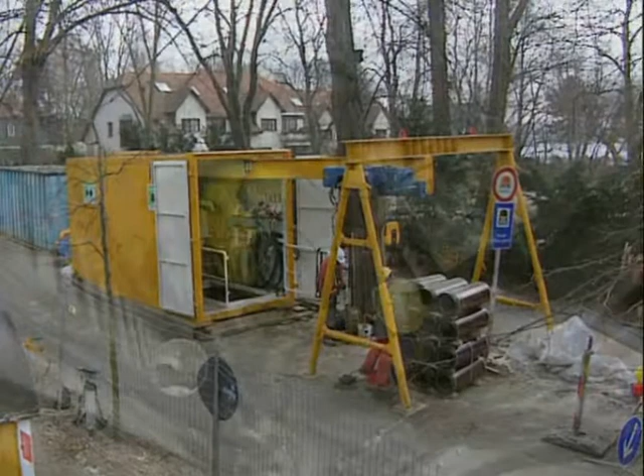Throughout the world, pipe jacking and microtunneling are becoming increasingly important for the installation of new service pipes and sewer pipes. The Herrenknecht AVN series introduced in this film has been deployed successfully on every continent.

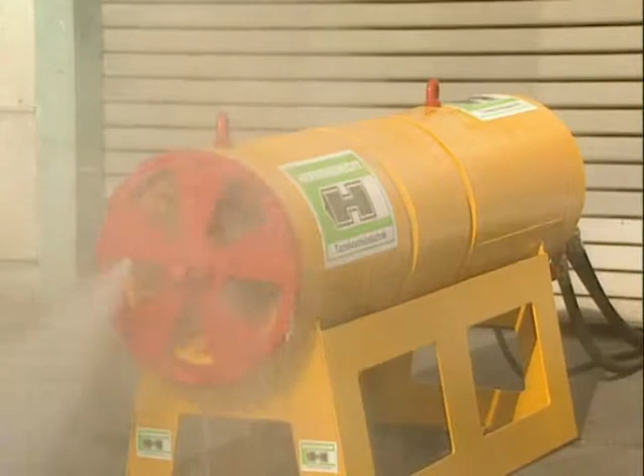The advantages of the pipe jacking and microtunneling process are evident, especially in urban city areas. Pipe jacking causes minimum disturbance along the construction route, so there's virtually no disruption to the flow of traffic or any impact to the local economy. In contrast to conventional methods in such construction projects, pipe jacking and microtunneling is an environmentally friendly method and helps

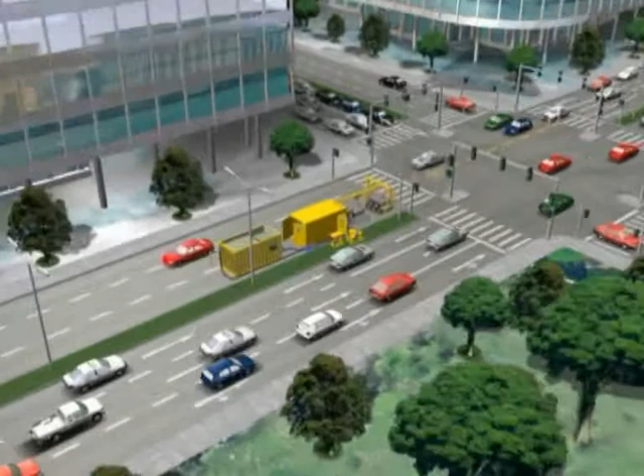The following animation shows the installation of new sewer pipes DN600 in an urban crossroad with dense traffic. The whole construction site can be located in a way that only one lane is blocked.

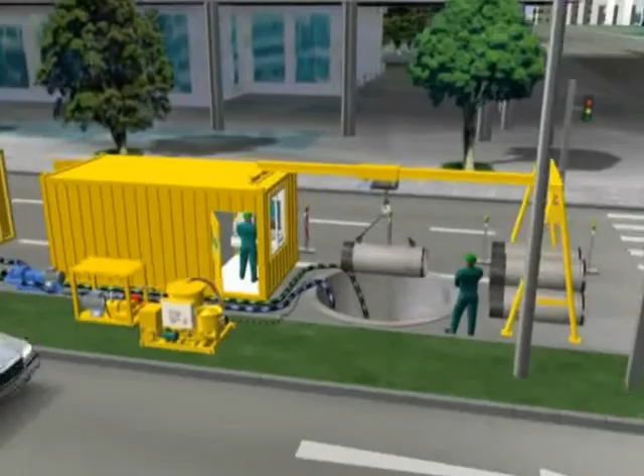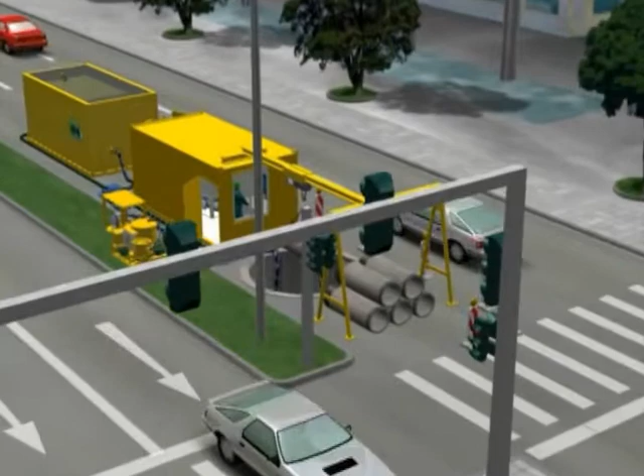In our example, 150 meters of sewer pipe are to be jacked from the launch shaft to the reception shaft. At the first stage, the area around the starting shaft is cordoned off to divert the traffic. Due to the compact design of the machine and the small diameter of the starting shaft, there will only be minor disruption to the traffic flow.

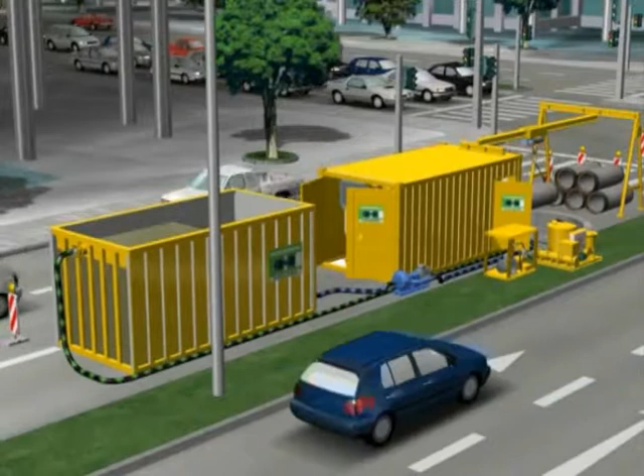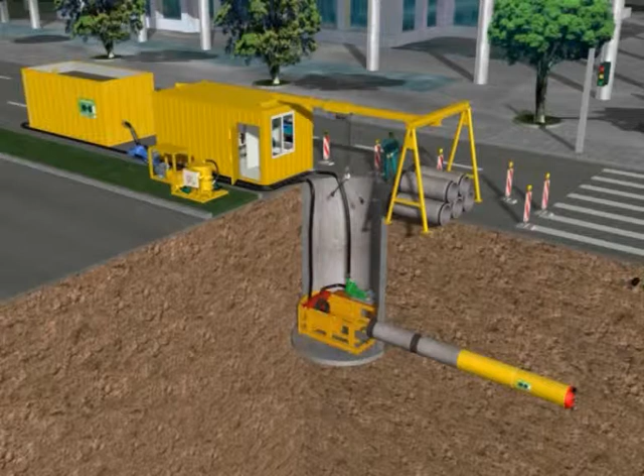In this case, the starting shaft consists of a round shaft of reinforced concrete with an inner diameter of 3.2 meters. The compact jacking frame is then placed into the starting shaft, and the slurry discharge pump is mounted on a platform adjacent to the jacking frame. The operating container with the control panel and the hydraulic power pack is located on the top rear side of the shaft. A pipe stock is then established and maintained in front of the shaft to feed the shaft crane.

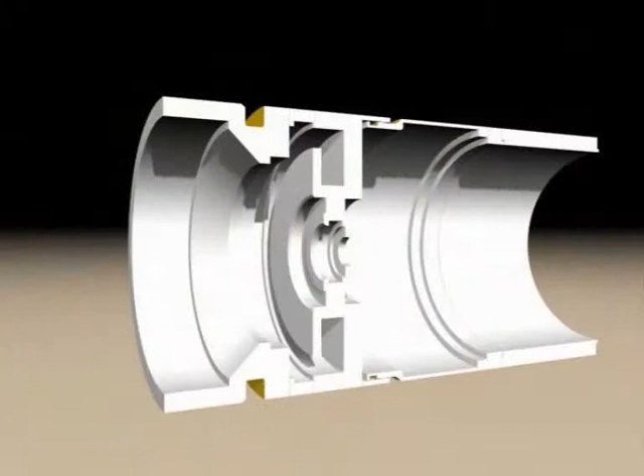The slurry feed pump and the slurry discharge pump are connected between the shaft and the control container, and then connected through the separation plant to form a closed slurry circuit. The AVN 600 machine consists of several segments.

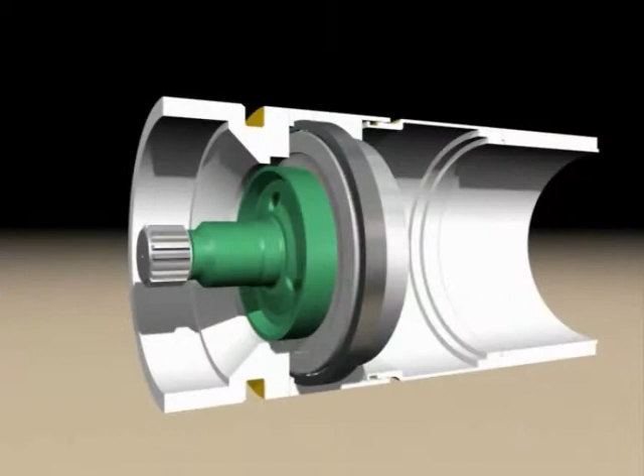A sleeve shaft with 3 bolt holes connects the cutting wheel with the drive unit. Fresh water is then pumped from the slurry tank and centrally pushed through the machine to pick up the excavated material. The mixed slurry is then picked up by the discharge pump and transported to the separation plant on the surface.

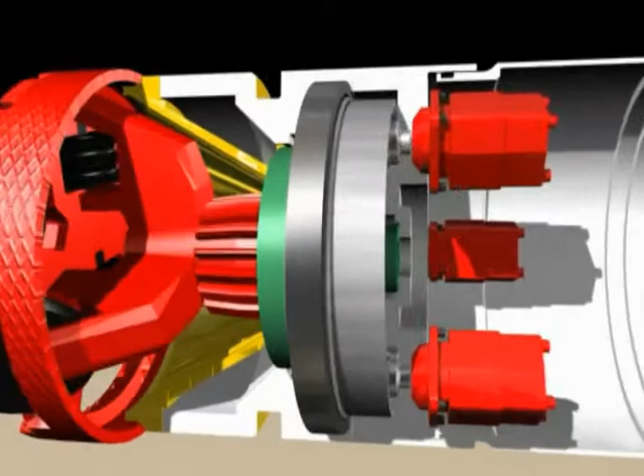The conical crusher situated in front has reinforced cutting bars and is provided with nozzles to inject the fresh water. The drive shaft, which is connected to the cutting wheel, is driven by hydraulic motors. The sleeve shaft lies in a tapered roller bearing. 3 hydraulic motors transmit the rotation via the gear rim to the sleeve shaft and the cutting wheel.

The 3 steering cylinders enable the operator to correct the direction of the tunnel boring machine, as well as control the alignment of the machine in curved drives. Therefore, the position of the cutter head is continuously updated with the help of the laser guidance system.

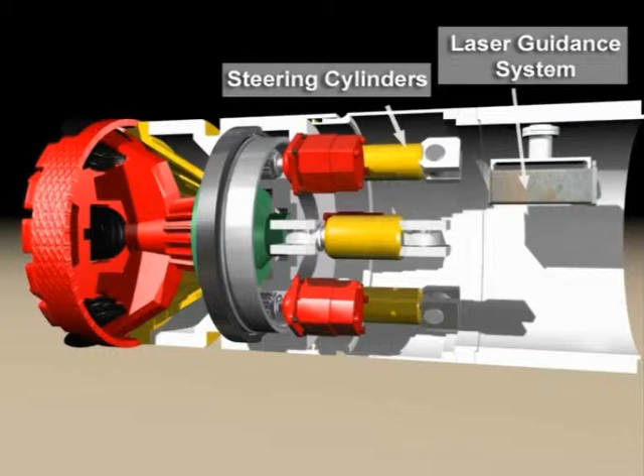To ensure AVN 600 has a smooth method of excavation, the machine has 2 integrated water circuits. The standard water circuit supplies fresh water to the annulus via 5 hoses fixed to the inner side of the bulkhead.

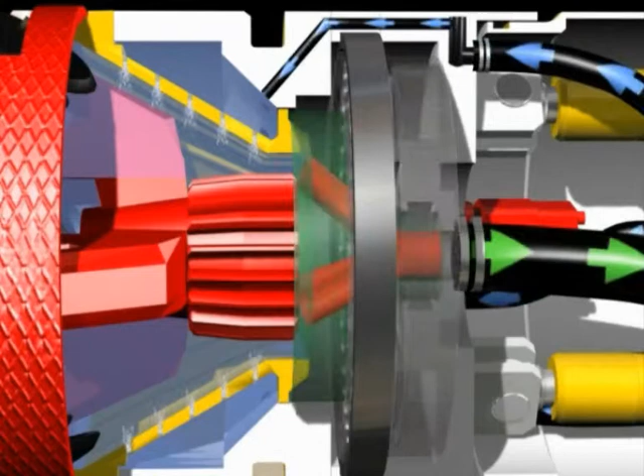Several boreholes branch off from the annulus, which supply the chamber situated behind the conical crusher. The fresh water is continuously pumped through the conical crusher chamber and sucked off through the boreholes of the sleeve shaft and transported back to the surface with the shaft slurry pump up to the separation plant.

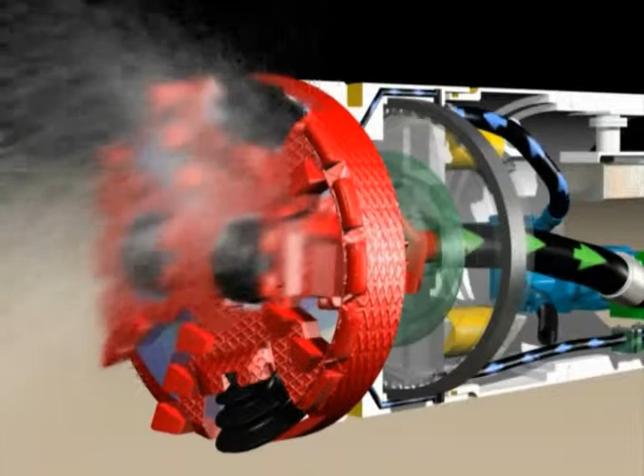A second hose supplies the high-pressure nozzles used in the conical crusher. These nozzles avoid clogging and agglutination of the crusher chamber in case of cohesive soils. They cut the clay in the crusher chamber with 250 bar water pressure and break up the material. There are also 2 nozzles that are directed to the front part of the cutting wheel.

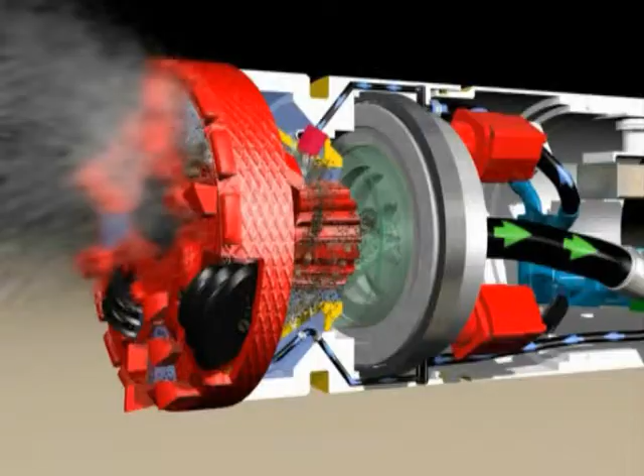This totally depends on the geological situation, as the number of nozzles can be increased. The water coming from the nozzles is mixed with the water of the slurry circuit, and the excavated material is transported to the surface.

The cutting wheel excavates the material at the tunnel face, which is pressed into the crusher chamber and is ground into the appropriate grain size by the spokes of the cutting wheel, which operates on the same principle as a coffee grinder.

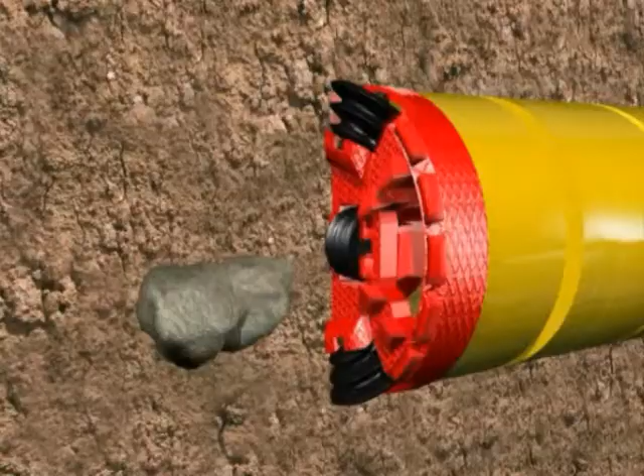Large stones are crushed by the discs of the cutting wheel. Sometimes fragments are driven out into the surrounding soil.

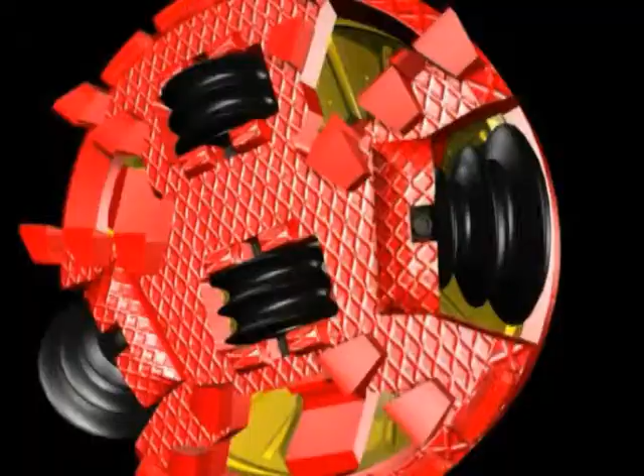Stones falling through the openings of the cutting wheel into the crusher chamber are crushed by the reinforced conical crusher and the spokes of the cutting wheel, and afterwards transported together with the slurry water to the surface.

The material is picked up in the slurry circuit and transported to the separation plant through the central slurry discharge hose.

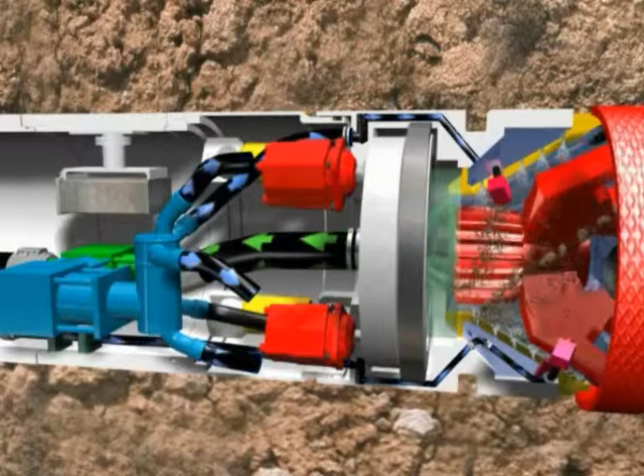The slurry discharge hoses and the slurry feed hoses pass through the center of the jacking pipes via the jacking frame up to the surface. The slurry discharge pump removes the excavated material and pumps it up to the separation plant.

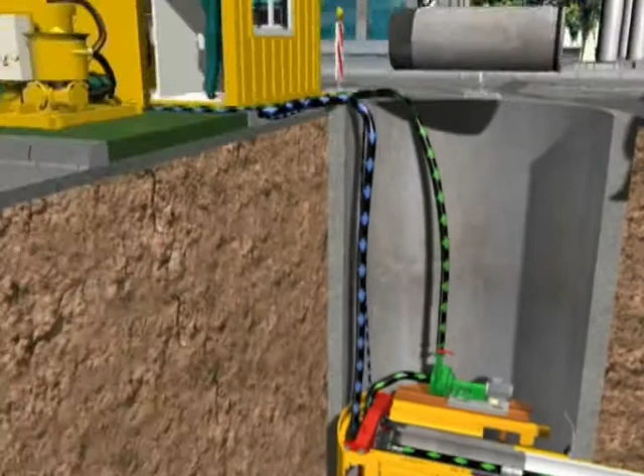The separation plant consists of two chambers. At first, the excavated material is pumped into the back chamber, where it settles due to gravity. The overrunning water is filtered and enters the front chamber, from where the clean water is sucked by the slurry feed pump and returned to the slurry circuit, thus creating a closed system.

The product pipes are lowered into the shaft one after the other and connected with snap connectors. The jacking frame works in three stages.

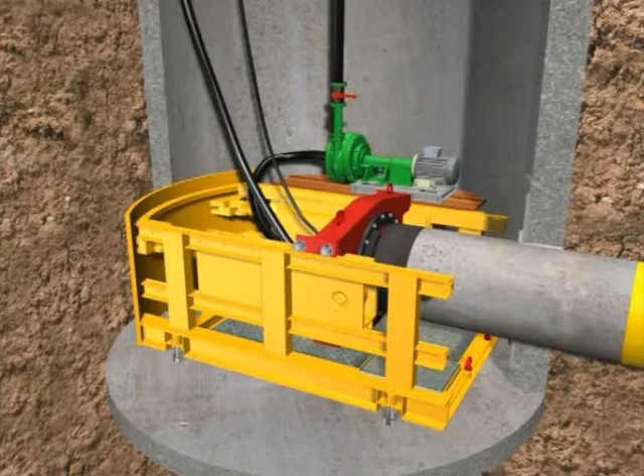After approximately one-third of the maximum piston stroke, the jacking arms return, and the main thrust ring of the jack can advance further. After jacking the product pipe, the connecting hoses, which connect the TBM to the container, are disconnected.

The jacking frame is returned to its original position, and the next product pipe is connected. This procedure is repeated again and again until the whole drive length is completed, reaching the reception pit.

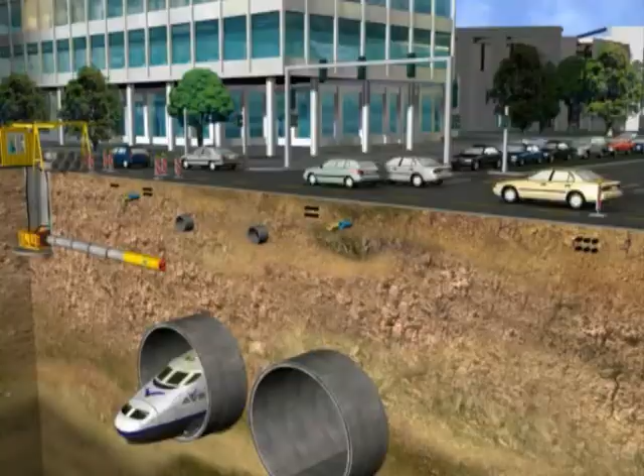Crossing pipes and buildings are no problem with this technique, as they can be easily overpassed or undercrossed. Thus, the machine arrives in the reception shaft exactly at the planned coordinates.

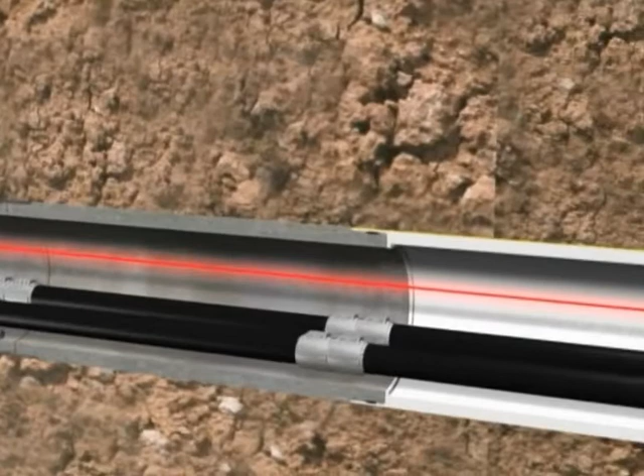The drive is continuously monitored by a laser measuring system. This laser system is positioned in the starting shaft, meeting the target, which is installed in the cutter head. The laser determines the reference axis.

The laser target identifies any deviation which may occur. The coordinates are transferred to the steering computer in the container and visualized on the screen. Any deviations in position can be corrected by adjusting the steering cylinders at the push of a button on the control panel.

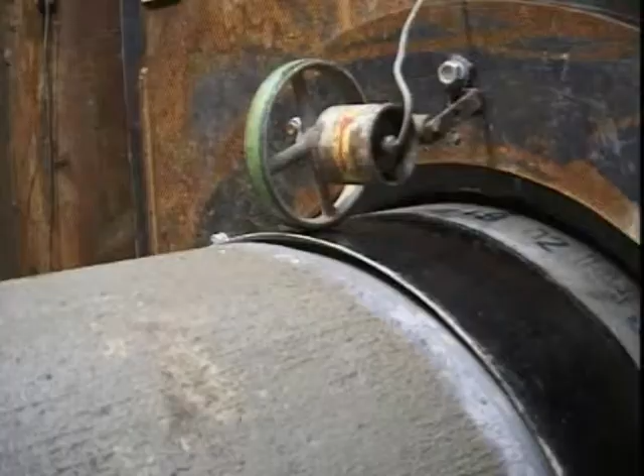The length of the tunnel is recorded by a metering wheel. This information is transferred to the control panel, allowing the operator to visualize the location and direction of the machine cutter head at any time.

In our example, a total of 150 meters of new pipes could be realized with only a minimum of disturbance in a difficult infrastructure. The conventional open laying of pipes would have caused major disturbance and annoyance for traffic and the residents.